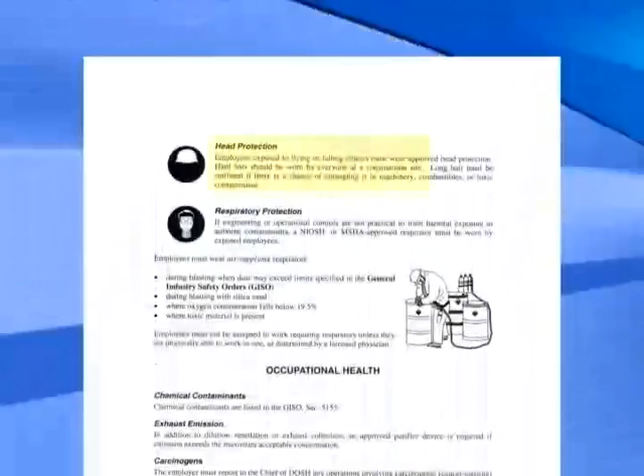Please take out your books and let's start with health and safety orders on page HS1. California administers its own program for workers' health and safety via the California Occupational Safety and Health Administration, Cal-OSHA. I have taken a number of trade exams, including the general engineering and the general building, and I have found a number of questions on those exams relating to health and safety. It's important. Construction is a dangerous business, and it can be made safe, and it's necessary to be made safe.

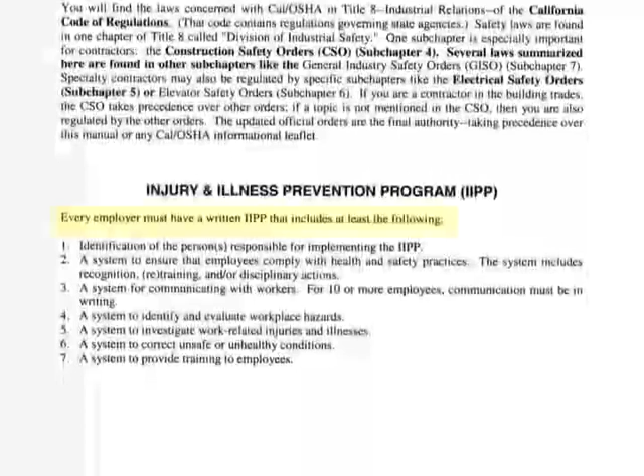So let's get started. On the third paragraph on this first page, in the middle of the paragraph, it talks about construction safety orders. This is what you're going to be tested on, and this relates to construction industry regulations and safety matters. Let's take a look at the bottom of the page, the Injury and Illness Prevention Program. Understand that every employer must have a written IIPP that includes at least the following, and there are 7 items there, 7 programs or systems. Look over that, understand what you're going to be needing to have for your health and safety regulations.

Going on to the next page, HS2. One of the things that is particularly emphasized is tailgate meetings. It is required that you have a tailgate meeting for health and safety every 10 working days. It is also recommended that you have a supervisors and management meeting once a month to discuss safety and implement safety and health regulations. You should also have a code of safe practices, a written code. Now you'll find that available through Cal-OSHA, and they will help you with model codes so you can get what you need from Cal-OSHA.

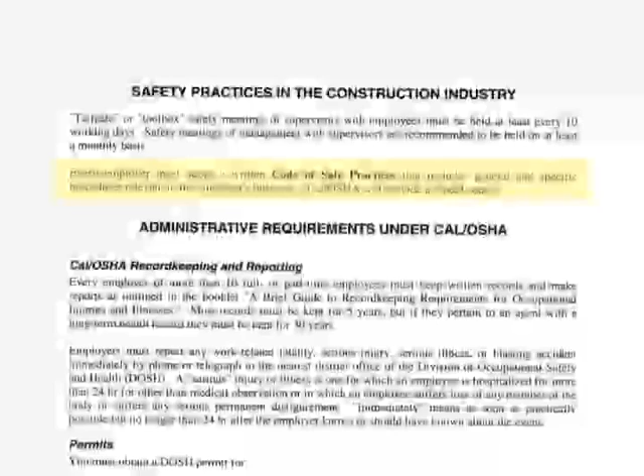Let's look at some of the administrative requirements under Cal-OSHA. In that first paragraph under administrative requirements, note that you do have to keep written records, and they have to be kept for 5 years. And if they deal with matters such as asbestos that are long-lasting, you'll have to keep them for some 30 years. As you go through this health and safety part of your trade exam, make sure that when you see numbers like 5, 30, that you're most likely going to be asked a question about that, and you should pay attention to those pieces of information.

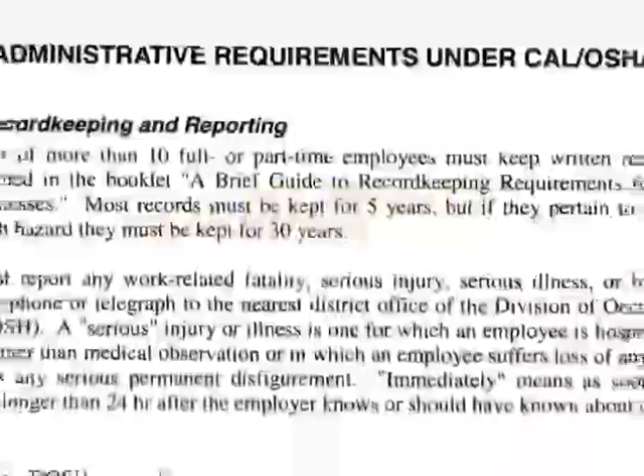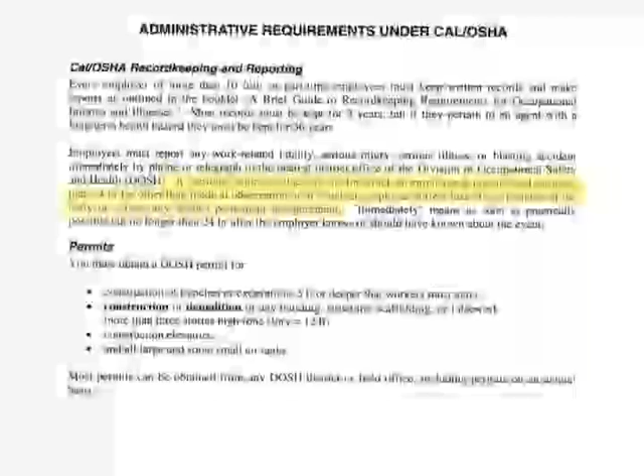In that second paragraph where it begins, employers must report. They must report any fatality, serious injury, serious illness, or a blasting accident, immediately by phone or telegraph to the nearest district office of the Division of Occupational Safety and Health, DOSH. What is immediately? Immediately in this sense indicates that you have to get back to them within 24 hours. And what is a serious injury? A serious injury is when an employee suffers a loss of any member of the body or has to be hospitalized for 24 hours or longer, not just for observation but for treatment. And serious injury also includes disfigurement, permanent disfigurement.

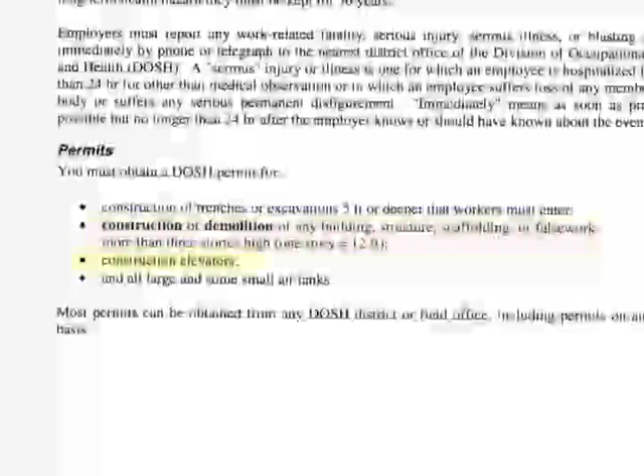Looking at the bottom of this page under permits, let's look at when you do need to get a permit from DOSH. If your construction, excavation, or trench is 5 feet or deeper and the workers must enter, you will need to get a permit. If the construction or the demolition of any building or structure is more than 3 stories high, 1 story is 12 feet. If you're dealing with construction elevators, and if there's any large or sometimes small air tanks, in those situations you will need permits from DOSH.

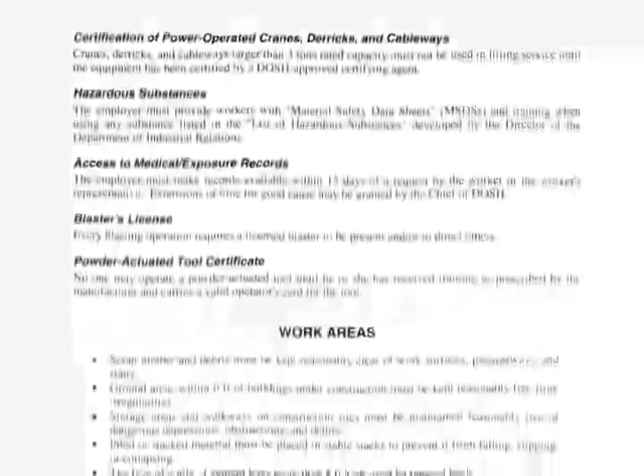Let's turn to page HS3. There's several things here I'd like to talk about. Let's look at hazardous substances. The employer must provide workers with material safety data sheets, MSDS, and training when using any substance listed in the list of hazardous substances developed by the Director of the Department of Industrial Relations. There's another thing I'd like to mention here, the Powder Actuated Tool Certificate. No one may operate a powder-actuated tool until he or she has received training as prescribed by the manufacturer and carries a valid operator's card for the tool. And I also want to call your attention to work areas.

There are several general rules for how to organize things, particularly that the face of a pile of cement bags more than 5 feet high must be tapered back.

I was at a situation many years ago where the bags were stacked up quite higher than that. All of a sudden they started to creep and move. The worker didn't realize it was happening. I alerted him and he jumped out of the way. The bags all came down, but fortunately all of us were safe.

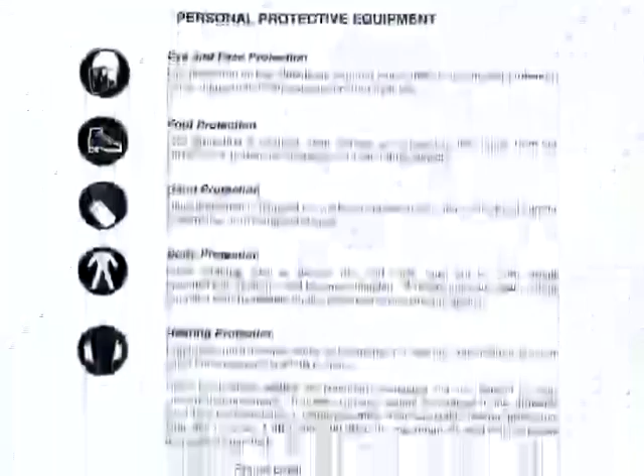Turning on to page HS4, read through this. One of the things Cal OSHA is particularly concerned about is hearing protection. Employers must monitor noise and administer a hearing conservation program when noise exposure is 85 decibels or more.

To give you an idea of what a decibel is, if you're at home speaking, the decibel level is about 60. If you're at a construction site and hear a riveting machine about 30 feet away, you're at about a 100 decibel level. Look over this and understand that as sound levels get higher, the allowed exposure time is reduced significantly. At the bottom of the page it indicates a couple of ways of protecting your ears, through earplugs or sound deadening earmuffs.

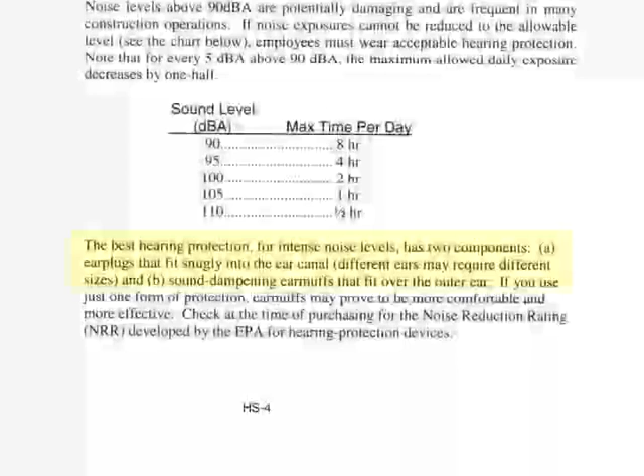Going on to page HS5, at the top, head protection is dealt with, and then respiratory protection. Cal OSHA is particularly concerned about respiratory protection. This is a condition that can cause serious injury very quickly.

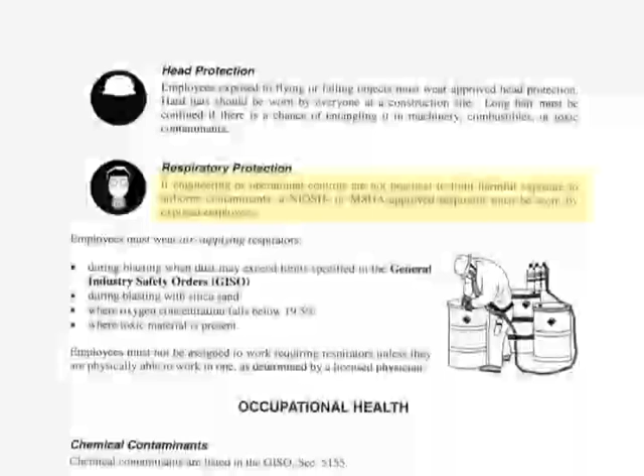If engineering or operational controls are not practical to limit harmful exposure to airborne contaminants, a NIOSH or MSHA approved respirator must be worn by exposed employees. When we talk about engineering or operational controls, in other words, if they can't contain the contaminant away from the employee, then the employee has to put on a respirator of some sort.

There are certain situations where an employee must wear air supplying respirators. There are two different types of respirators. One is an air purifying respirator, which deals with the ambient air and filters out the offending contaminants. The second type is an air supplying respirator, in which air from another source, totally separate from the environment around the worker, is used.

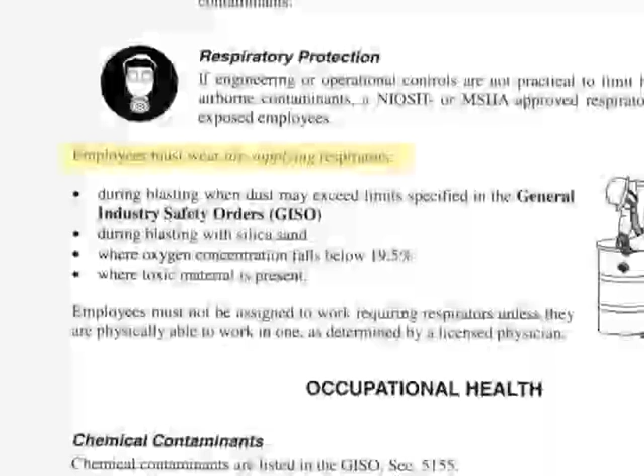Air supplying respirators are used during blasting when dust may exceed limits specified in the general industry safety orders, during blasting with silica sand such as sandblasting, or where oxygen concentration goes below 19.5%, or where toxic material is present.

And this is an important item, a little two-line sentence just above occupational health: employees must not be assigned to work requiring respirators unless they are physically able to work in one, as determined by a licensed physician. Let's go on to occupational health.

Read through the next part there, dealing with chemical contaminants, exhaust, carcinogens, cancer-causing items, and wood preservative chemicals. And then let's get on to page HS6.

We're going to be talking about asbestos. Cal OSHA is quite concerned about asbestos and has several regulations. If you are in a situation where you're going to be dealing with a 0.1% asbestos by dry weight situation...

where it's going to be either sanded, ground, blasted, sawn, cut, shoveled, or removed—in other words, dealt with in virtually any way that might disturb or cut it—it is required that you report that operation to the chief of DOSH before you begin.

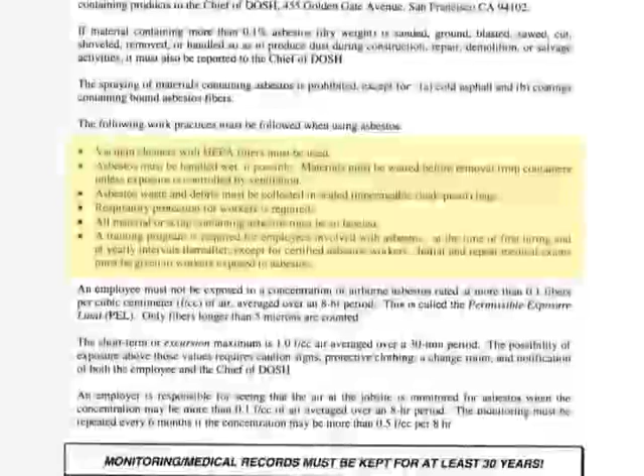On the fourth paragraph, let's look at the following work practices that must be followed when using asbestos. A HEPA filter must be used—this is a certain type of high-level filter. Asbestos must be handled wet if possible. Asbestos waste and debris must be collected in sealed, impermeable, leak-proof bags.

Let's look at exposure. There are two different types of exposures. Just at the middle of the page, it begins: an employee must not be exposed to a concentration of airborne asbestos rated at more than 0.1 fibers per cubic centimeter, averaged over an 8-hour period. This is called the permissible exposure limit, or PEL. Only fibers longer than 5 microns are counted.

There's an additional type of exposure called an excursion exposure, more or less an in-and-out exposure. The short-term or excursion maximum is 1 fiber per cubic centimeter of air, averaged over a 30-minute period. Possibility of exposure above those values requires caution signs, protective clothing, a change room, and notification of both the employee and the chief of DOSH.

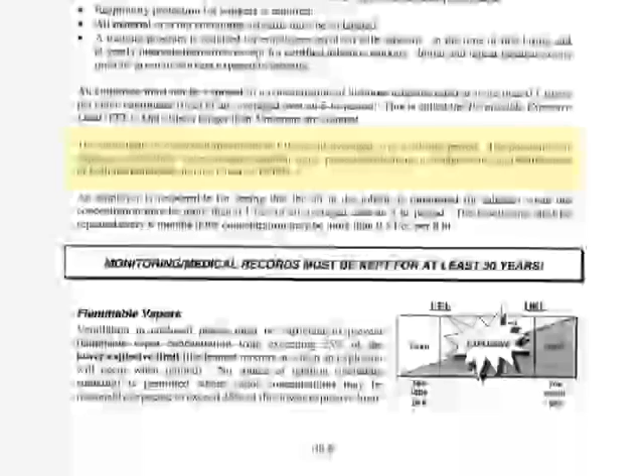Toward the bottom of the page, there's a big capitalized, bold statement. Commit this to memory: monitoring or medical records must be kept for at least 30 years. Asbestos is a long-lasting item that concerns health and safety, and we need to have those records available.

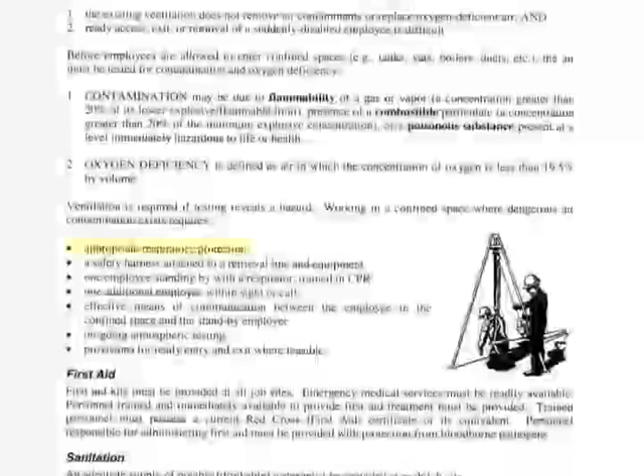First, of course, is respiratory protection. Next is a safety harness attached to a retrieval line and equipment. Here's an important item: an additional employee, or one employee standing by with a respirator trained in CPR, outside of the area, not inside the area. And 3 or 4 more items - go ahead and read through that.

Toward the bottom of the page, under sanitation, 1 toilet must be provided for every 20 employees. Commit that to memory - you'll most likely see that on a trade exam.

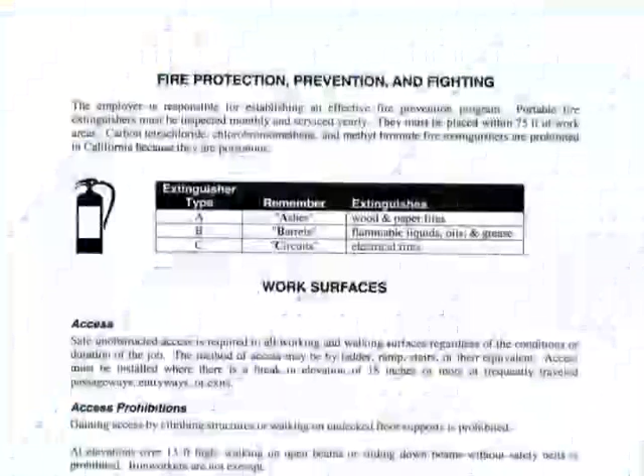On to page HS8, fire protection, prevention, and fighting. One of the important items in this first paragraph at the top of the page: portable fire extinguishers must be inspected monthly and serviced yearly. I'll repeat that - inspected monthly and serviced yearly. And they must be placed within 75 feet of work areas.

You might be asked about these next 3 chemical compositions, whether they are allowed. They are no longer allowed because they are poisonous: carbon tetrachloride, chlorobromomethane, or methyl bromide.

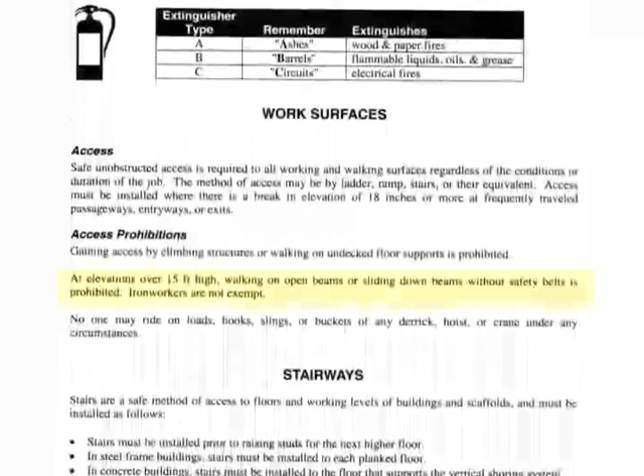Down to the middle of the page, under access prohibitions: at elevations over 15 feet high, walking on open beams or sliding down beams without safety belts is prohibited. Iron workers are not exempt. Read through the stairway section toward the bottom of the page, and let's go on to page HS9.

Ladders. We have a healthy respect for ladders, and Cal OSHA has a lot to say about ladders. Ladders are used in almost every trade. I have a healthy respect for ladders - I remember some years ago, I fell off a 3-foot high part of a ladder and ended up with a 4-month set of crutches.

So let's take a look at ladders. The very first part: ladder rungs must be at least 11.5 inches long and spaced 12 inches apart. Step ladders may not be taller than 20 feet - a step ladder that tall would be pretty heavy. You usually see them maybe up to 14 or 16, but the limit is 20 feet. Cleat or straight ladders may not be longer than 30 foot, and extension ladders may not be taller than 44 foot.

Overlapping sections must be at least 10% of its working length. So if you have a 20-foot ladder, you have to overlap it by 2 feet. Look over the rest of this page on job-built ladders and landing platforms, and understand the safety thrust that's going on here.

Turning the page to HS10, ladder safety: secure ladders in use against movement. I had a situation where a worker didn't do that - just recently he's nursing a ruptured Achilles tendon, and maybe another part of his foot. He's getting fine, but as we said, after the accident, ladder safety.

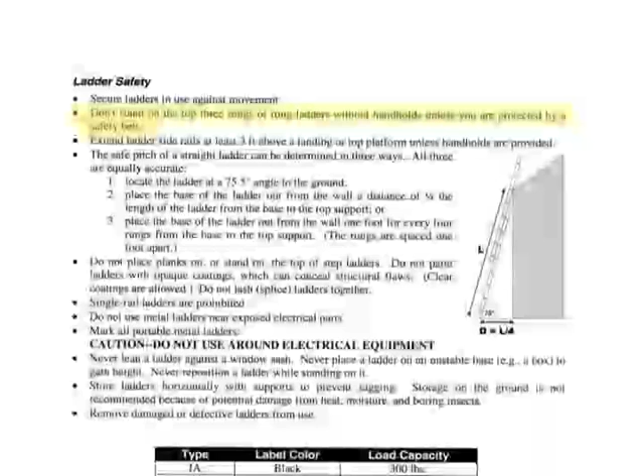Don't stand on the top 3 rungs of rung ladders without handholds unless you are protected by a safety belt. Okay, that's an important item. And extend ladder side rails at least 3 feet above a landing or top platform unless handholds are provided.

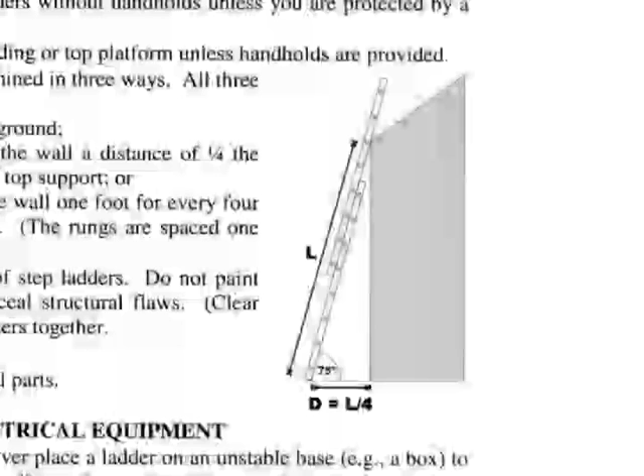The next part, determining the safe pitch of a ladder, is very important. You most likely will see this on one trade exam or another. Let's take a look at a couple of the ways to do it. First way to set a ladder correctly is to put it at 75.5 degrees angled to the ground. This is very important - look at the little diagram to the right there, you can get an idea of what 75 degrees looks like.

In day-to-day construction on the job site, one of the easiest ways to do it is to put it 1 foot out for every 4 foot up. That works out simply to be a 1-to-4 ratio. So 4 feet up, 1 foot out. If you're 12 feet up, then you're going to be 3 foot out.

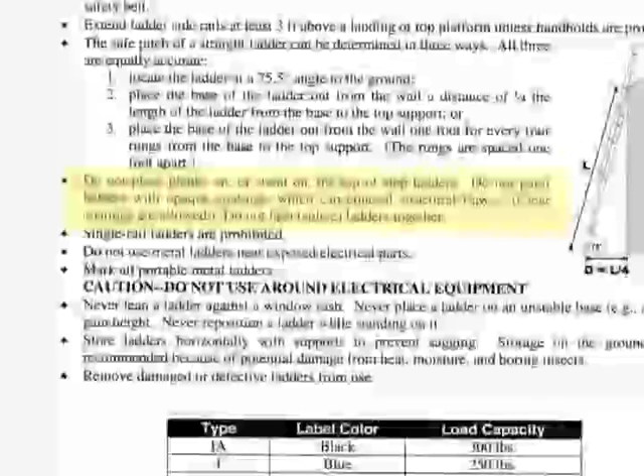Do not place planks on or stand on the top of step ladders. And do not paint wood ladders, particularly, with opaque coatings. Why? With the paint, you're going to cover over cracks in the ladder that indicate it should be destroyed and discarded. Also, do not use metal ladders near exposed electrical parts.

The next item is marking metal ladders. Mark all portable metal ladders: caution, do not use around electrical equipment. Why do we put that caution sign on metal ladders? Metal ladders are conductors. If the top of that metal ladder connects with a high voltage line, you seriously risk electrocution. It has happened too many times, so take that caution.

Go ahead and read down through the rest of the page, noting the different types of ladders. I myself like to purchase the 1 or 1A ladder, even though it might weigh a few more pounds.

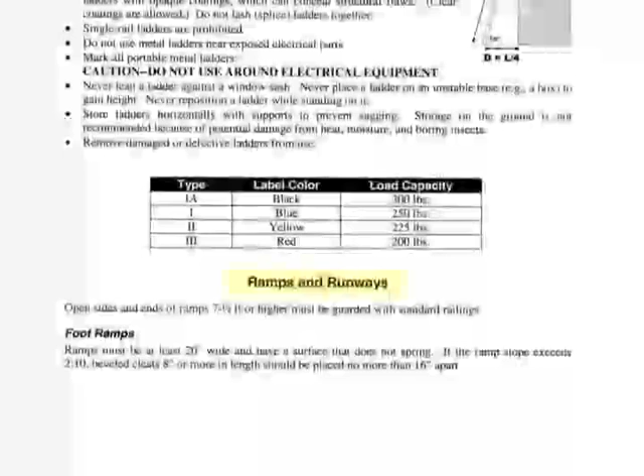Continue reading down through ramps and runways, and let's go on to page HS11. Toward the top of the page, powered buggy ramps and runways. Ramps and runways must be at least 5 feet wide and designed with turnouts for two-way traffic. It's important that you know that, it's a question that may well be asked of you. It's a simple item to remember: 5 feet wide for a ramp or runway.

Read through construction elevators, and let's go on to page HS12. We're going to be talking about excavations, trenches, and earthwork. This is a very important part of safety and health. DOSH has unfortunately found out that there are a lot of fatalities, particularly in trenches, and it's sudden.

Let's look at, before you dig, go ahead and read through that, and let's look at a situation where you have 4 feet or more depth from digging a trench. I'm going to read it to you: provide a safe way for workers to enter and leave the excavation, for example ladders, within 25 feet of any work area, a minimum of every 50 feet at a large site.

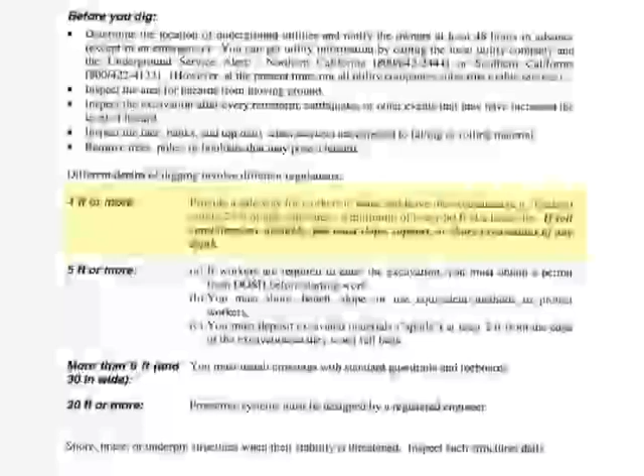And if soil conditions are unstable, you must slope, support, or shore excavations of any depth. If you're at a situation where you're 5 feet or more, pay particular attention to the first item there of 3. Number 1, if workers are required to enter the excavation, you must obtain a permit from DOSH before starting the work. Pay attention to that. Read those other 2, and then let's go on to the next page, HS13.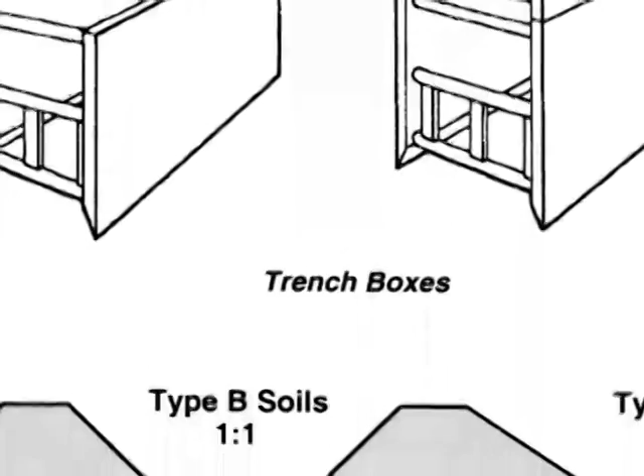We deal with shafts and shoring on this page, and underneath the diagram where it shows the trench boxes, which are huge steel constructions, it shows the different types of soils. Let's look at the second diagram where it shows different types of soils. Note that in type B soils, which is an average type of soil, you are required to do a 1-to-1 slope. In other words, it must slope back 1 foot for every 1 foot of height.

Let's go on to page HS14. Guardrails: open sides of all work surfaces 7.5 feet high or higher must be guarded by railings or periphery cables, or else workers must be protected by safety belts or nets. Floor and roof openings in any work surface must be covered or guardrailed. Covers must bear a warning sign.

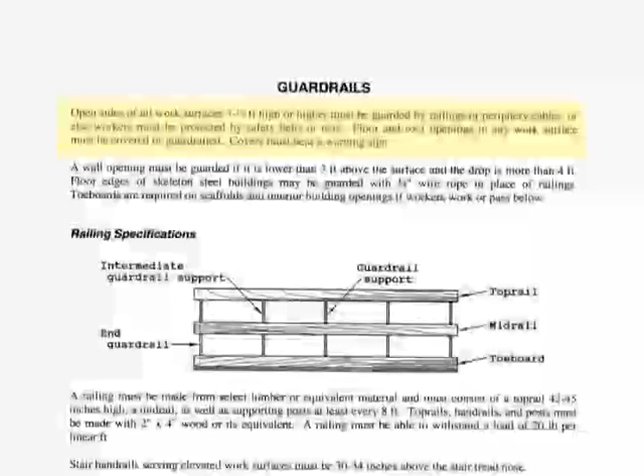Let's take a quick look at the sketch here, or the diagram of the railing. Note that it has 3 rails: a top rail, a mid rail, and a toe board. The purpose of the toe board is to keep things from falling down onto workers below, particularly heavy tools or materials such as bricks. Please go ahead and read the information on floor planking, and then let's go on to page HS15.

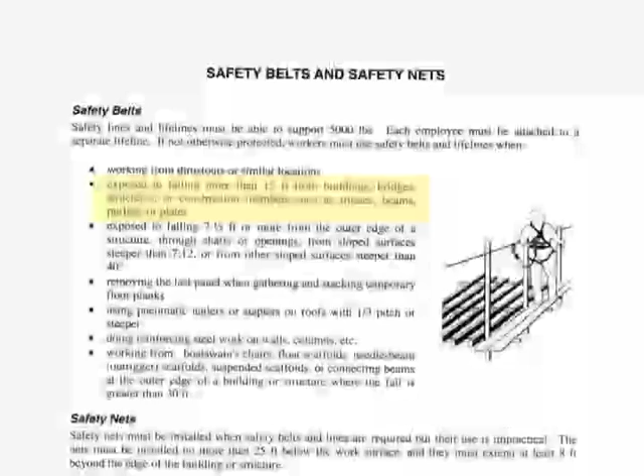Safety belts at the top of the page. Look at that second bullet: if you are exposed to falling more than 15 feet from buildings, bridges, structures, or construction members such as trusses, beams, purlins, or plates, you are required to be in a safety belt. Look at the rest of those bullets, go ahead and read through those.

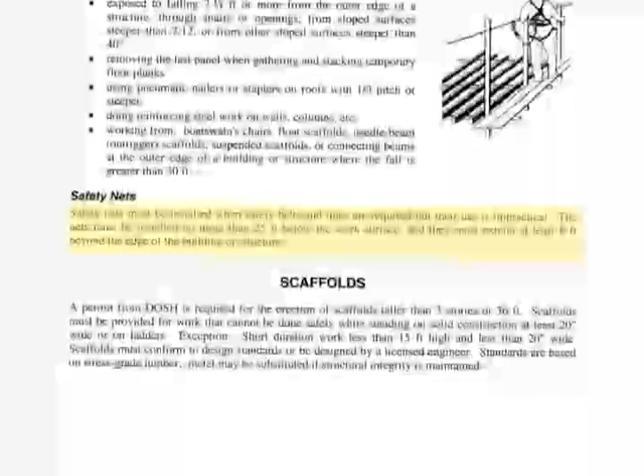Let's come down to safety nets. When are safety nets needed? Safety nets must be installed when safety belts and lines are required, but their use is impractical. In other words, the safety belt would be in the way of getting the job done. The nets must be installed no more than 25 feet below the work surface, limiting the fall to a maximum of 25 feet, and they must extend at least 8 feet beyond the edge of the building or structure.

Let's look at scaffolds. Scaffolds are very convenient for construction work and very dangerous, so DOSH puts a lot of information and attention on scaffolds. As a matter of fact, one of the founders of this company that provides these lectures, on his first day of construction, saw his friend fall from the scaffold and had to go tell the wife that he had died.

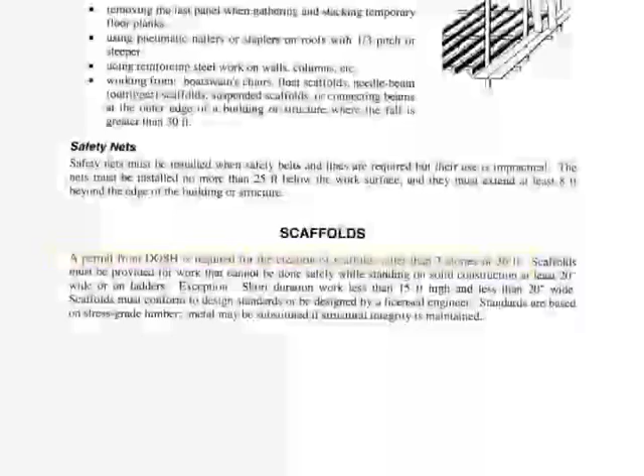So it's important that scaffolds be put up correctly and safely. If you're dealing with a scaffold that's going to be 3 stories or 36 feet or higher, you need to get a permit from DOSH before you get started with that. Read through the rest of scaffolds, and let's go on to page HS16. Required safety and access and securing scaffolds. Go ahead and read that.

Let's look briefly at scaffold platforms, light trades and heavy trades. Platform minimum width - how wide does that platform have to be? If it's a light trade, 20 inches by 10 feet in length, so it has to be at least 20 inches wide. If it's a heavy trade, it's going to have to be at least 4 feet wide by only 7 feet long - 7 is the maximum you could go. You would need a stiffer board for heavier trades, of course.

Let's go down to scaffold planking. This is using scaffold grade lumber, that's a high grade of lumber. Make sure that you've got scaffold grade lumber. The minimum size is 2 inches thick and at least 10 inches wide.

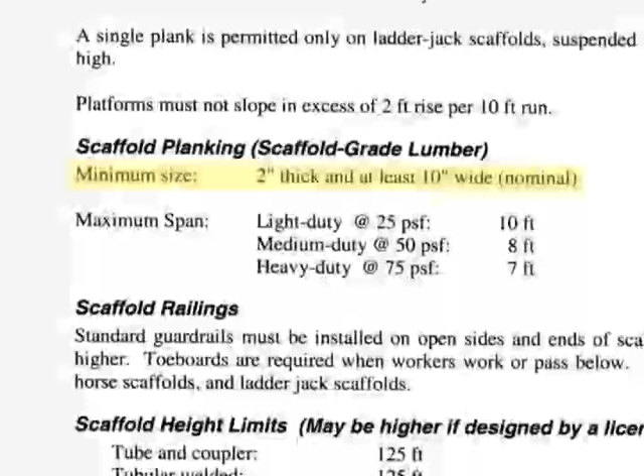Maximum span when using this scaffold planking - if you're a light duty trade like carpentry, for example, and you're at 25 pounds per square foot, you can get as much as 10 foot in length on your plank. But if you get into the medium duty or the heavy duty, look how that drops. It drops to 8 feet and then finally to 7 feet maximum for a heavy duty trade such as masonry.

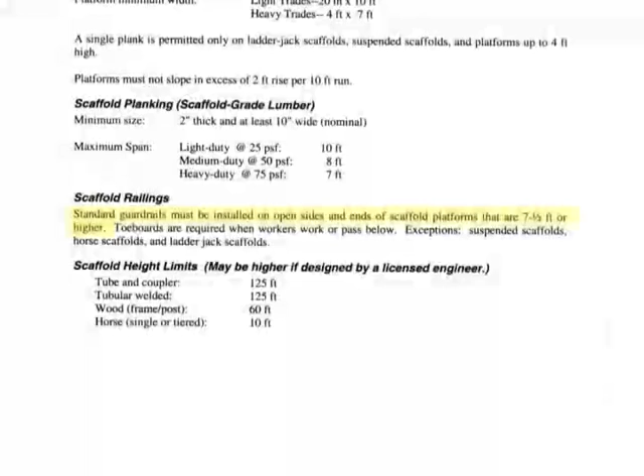On a scaffold railing, let's just go ahead and read here. Standard guardrails must be installed on open sides and ends of scaffold platforms that are 7.5 feet or higher. I don't know about you, but when I've been on a scaffold, if there's a railing around me, I feel I can do more work more efficiently and not have to worry about falling off that scaffold. So go ahead and put those guardrails up.

On scaffold height limits, let's look at the bottom of the page here. We've got 4. First 2 are heavy-duty steel of different types - you can go up to as much as 125 feet in height, that'd be essentially 10 stories. It's quite a bit. On a wood frame or post scaffold, you can go up 60 feet. On a horse, which is basically 2 sawhorses with planks on top, you can go up as high as 10 feet. Flip the page to HS17 and let's look a little bit more at some scaffolds that are prohibited.

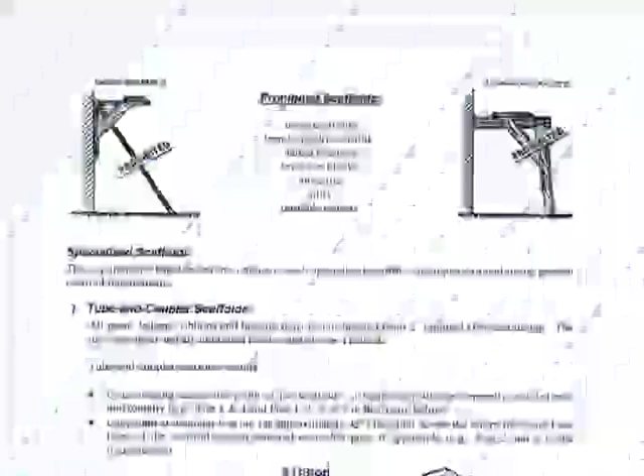Top of the page on HS17, the 2 at the top there, the diagrammed ones - that's the shore scaffold to the left, shored up by that diagonal pole, and the lean-to jack or jack scaffold on the right there. Why are they prohibited? Simply because they're site-built without an engineer on site. Cal OSHA has seen too many problems, too many bad accidents from these, so they simply out and out prohibit them. The next subject is specialized scaffolds.

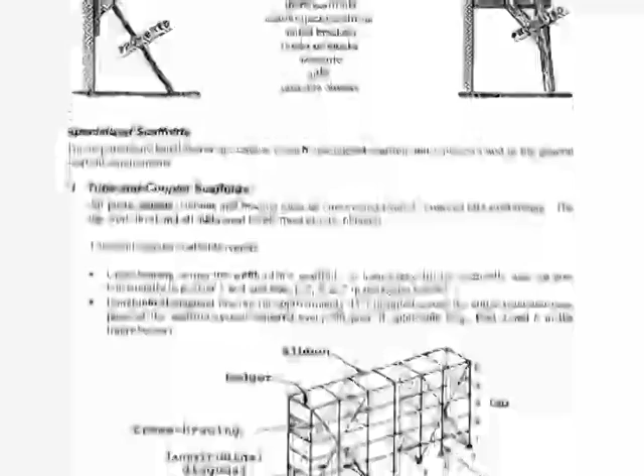Each trade has its own different type of scaffold, and as you study your trade exam, make sure that you understand the specific scaffolds used in your trade. You will most likely be asked questions about those types of scaffolds. Looking at the tube and coupler scaffolds, what I need you to do is simply look at the diagram and understand the different terms there - for example, ledger, ribbon, cross bracing, so on and so forth. Bring those to memory. Let's go on to page HS18.

Very top there, tower and rolling scaffolds. On that fifth bullet that begins, two wheels or casters must swivel, all four must lock. Until you have that situation on your scaffold, you're not legal with Cal OSHA.

And are you going to ride that moving scaffold? Well, it's prohibited unless all of the following conditions are met: the surface is smooth and within 3 degrees of level, and the smaller dimension of the scaffold base is at least half the scaffold height.

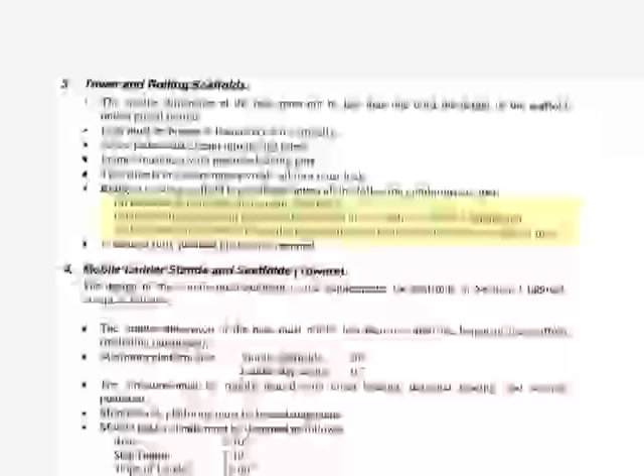And C, the wheels have rubber or similar resilient tires or metal wheels for towers 50 feet or more. Go ahead and look at mobile ladder stands and scaffolds, and let's get on to HS19.

Let's look at suspended bricklayers or masons scaffolds. This makes particular sense to me. When I took my masonry exam, my C29 exam, I had several questions regarding scaffolds because it was specific to a bricklayer. In your own trade, if you have those special scaffolds, pay particular attention to the requirements and rules and regulations from Cal OSHA. Most likely you'll be asked some very specific questions about those scaffolds.

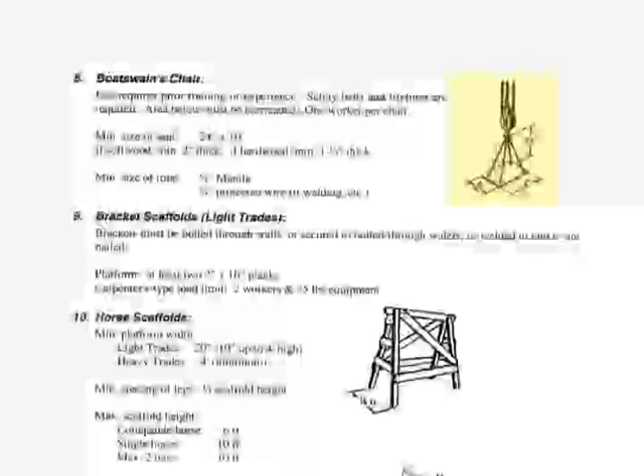Let's flip over to page HS20. Let's look at a couple of additional scaffolds over here. The boatswain's chair or the bosun's chair. Note that there's only one worker per chair in that situation. There's only really room, but sometimes people can be a little crazy and try to load it up with more than one. Let's drop down to horse scaffolds.

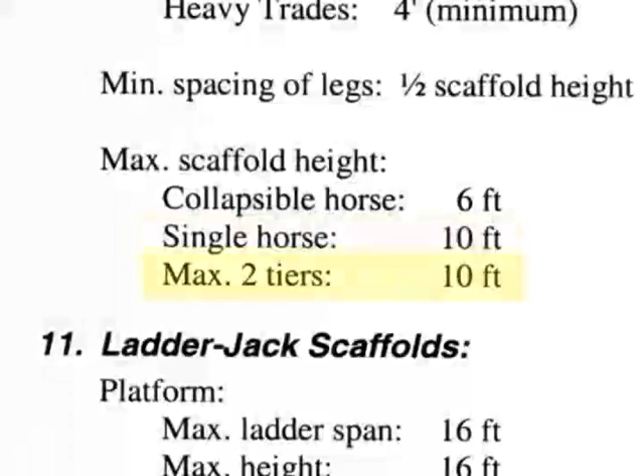These are frequently asked about in several trade exams. Let's look at the maximum scaffold height. For a collapsible horse, it's only 6 feet, so not very tall. For a single horse, the limit is 10 foot in height, and a maximum of 2 tiers. If you've got a lower tier and an upper tier, again, the maximum is still the same, only 10 feet.

On a ladder jack scaffold, it's where you have 2 ladders with a platform across them, and again, look at the diagram there. The maximum height is 16 feet. I've been on a couple of those. You know, I don't particularly care for those. They seem a little out in the middle of space, but it is legal as long as you keep them at 16 feet high or lower.

On the window jack scaffold at the bottom of the page there, again, there's another 1 worker per scaffold situation. Let's flip over to page HS21. We've finished up with scaffolds and now we're on to electrical.

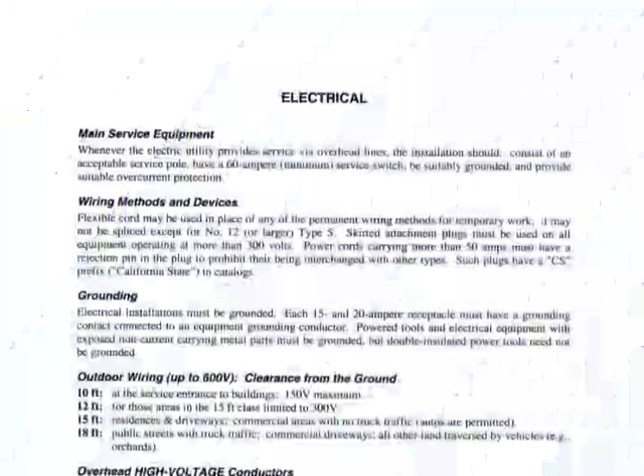Let's look at wiring methods and devices, the second paragraph there. Flexible cord may be used in place of any of the permanent wiring methods for temporary work. It may not be spliced except for number 12 or larger type S. Skirted attachment plugs must be used on all equipment operating at more than 300 volts.

So more than 300 volts, make sure you have a skirted attachment plug in place. Look at grounding. Electrical installations must be grounded. Go ahead and read through that. Let's look at outdoor wiring. Clearance from the ground. We have a couple of clearances, as in the next 2 or 3 paragraphs, but we're looking at clearance from the ground. Note that we have a 10-foot clearance, a 12-foot, a 15-foot, and an 18-foot. The thrust or the basic point is here: the more traffic you have, the more height you need for decent safety. So read through that section there, clearance from the ground.

Next section, overhead high voltage conductors. Go ahead and read that. Understand that you want to be at a safe distance as you work underneath high voltage lines.

Outdoor wiring, clearance from buildings. Before it was clearance from the ground. In this situation, it's clearance from buildings, neighboring buildings. Go ahead and read that. For example, open wiring and cables must clear a roof by 8 feet. Let's go on to page

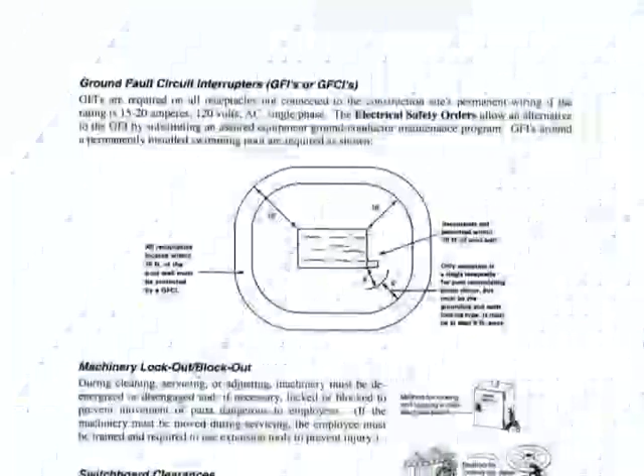HS22. Ground fault circuit interrupters, GFIs or GFCIs. In this diagram here, it is a swimming pool situation, and this diagram is based on the electrical safety orders of Cal OSHA. If you are using an NEC, that is a National Electric Code situation, you may find different numbers. If so, make sure that you know which context you are in. Are you in the NEC, or National Electric Code, context, or are you in a context in which Cal OSHA applies? Machinery lockout and blockout.

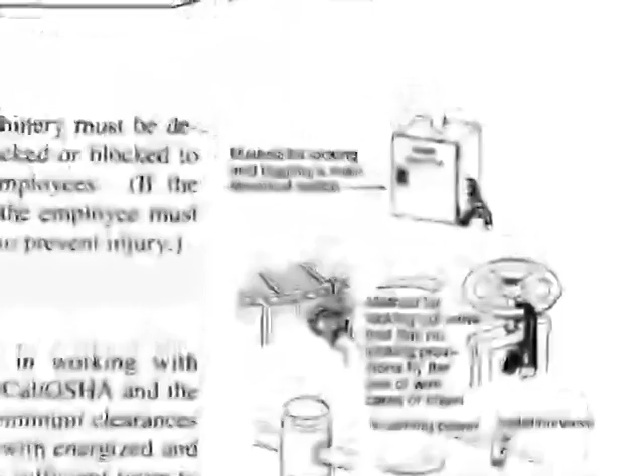This again is another very important item. A lockout situation, of course, is when you are going into an environment where the machine, if it is not turned off, can be very dangerous. So you turn it off and you put a lock on it. If it's a very dangerous situation, you may see 2 or 3 locks and several keys distributed to several individuals to make sure that nobody turns that machine back on again.

A blockout is a mechanical block, such that the machine, for example a stamping machine, cannot come down because there are huge blocks in the way.

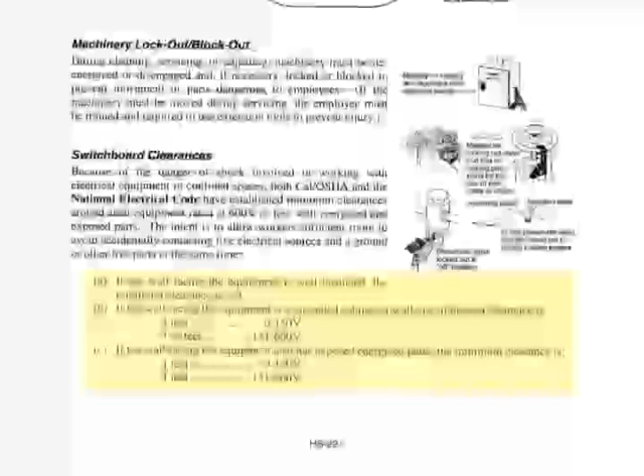Switchboard clearances. Look at the bottom of the page here, talking about how much working clearance you should have in electrical equipment. Read through that, and then let's turn to page HS23.

We're looking at tools. Go ahead and read through that, control switches, and so forth. Let's look at power tools for a minute. The more you use a cord, the more you abuse it, it gets stretched, the covering gets broken away. Pretty soon you've got a couple of bare wires ready to contact each other, or worse, somebody grabs it and doesn't realize it.

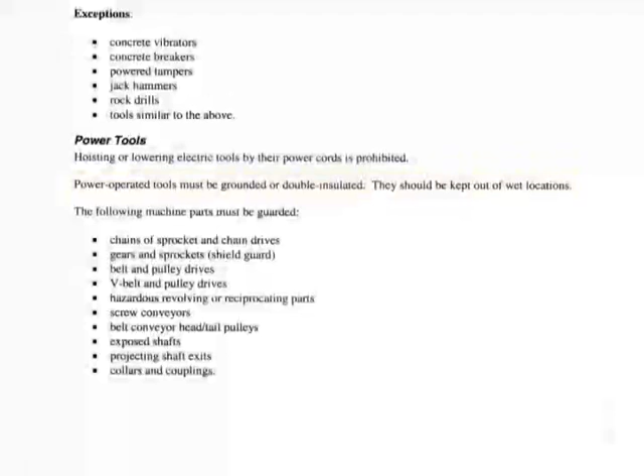Power-operated tools must be grounded or double insulated. They should be kept out of wet locations. Go ahead and read through the rest of that at the bottom of the page there, and let's turn to page HS24.

Let's look at PAT, powder-actuated tools. That is powder, not power. What do we mean by powder-actuated? This is typically a gun that will fire a hardened nail into concrete, for example, and it's powered by basically a .22 shell without the bullet. It's put into the gun, and in place of the bullet is the nail. It's a very convenient device, but in the hands of somebody who doesn't know what they're doing, it can be dangerous. So there are a number of rules and regulations.

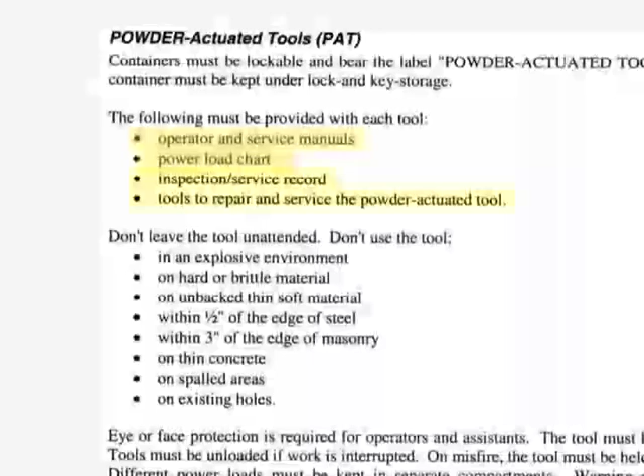Let's look at a few of them here. What must you provide with each tool? A manual - the first of four bullets at the top. A power load chart, the second bullet there. Inspection and service record, and tools to repair and service the powder-actuated tool.

And there's a number of bullets here. What do we have here? Eight bullets talking about where you should not use that powder-actuated tool - for example, in an explosive environment, and so forth. Go ahead and read through the rest of those.

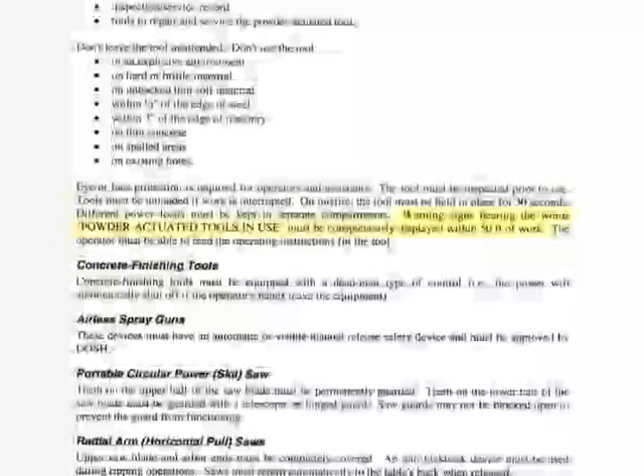In the middle of the page, where it begins, eye or face protection is required for operators and assistants. Read through that paragraph, pay particular attention to the second-to-last sentence where it begins, warning signs. Warning signs bearing the words 'powder actuated tools in use' must be conspicuously displayed within 50 feet of work. Most of the time on a job site when somebody is using one of these, you'll hear 'fire in the hole' before it goes off, so people are not surprised by the sudden explosive sound. Again, take care to read through that.

Look through the rest of these tools on this page: concrete finishing, airless spray guns, portable circular power or Skil saws, radial arm saws. Read through those, and understand the safety concept behind each one.

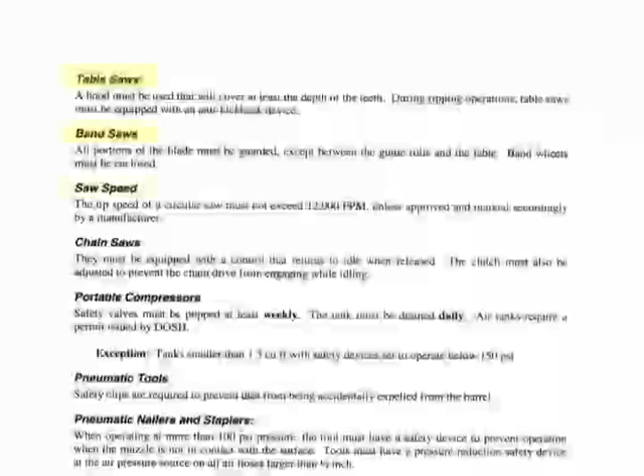Going on to page HS25: table saws, band saws, saw speed, chainsaws. Go ahead and read through that, again understanding the concept of safety being presented.

Let's look at portable compressors for a minute. Safety valves must be popped at least weekly. Tank must be drained daily. Make sure you understand the difference between popping the tank and draining the tank. Air tanks require a permit issued by DOSH.

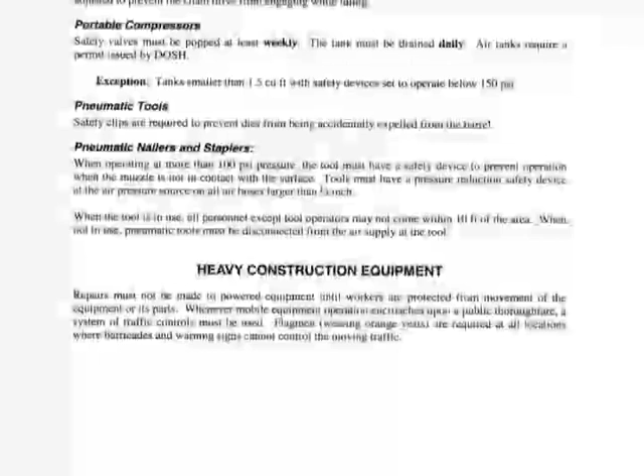Go ahead and read through pneumatic tools, nailers, and staplers. At the bottom of the page, let's start in on heavy construction equipment. One of the things I want to make sure you understand is that last sentence: flagmen wearing orange vests are required at all locations where barricades and warning signs cannot control the moving traffic.

Turning over to page HS26, let's look at rollover protection and seatbelts. Why rollover protection? In earth-moving equipment, you're always on a grade of some kind, and you can be just a little bit more tipped over than you think. Rollover protection and seatbelts are required for equipment with a brake horsepower rating above 20. Go ahead and look at those eight, ten or so bullets of different types of machines.

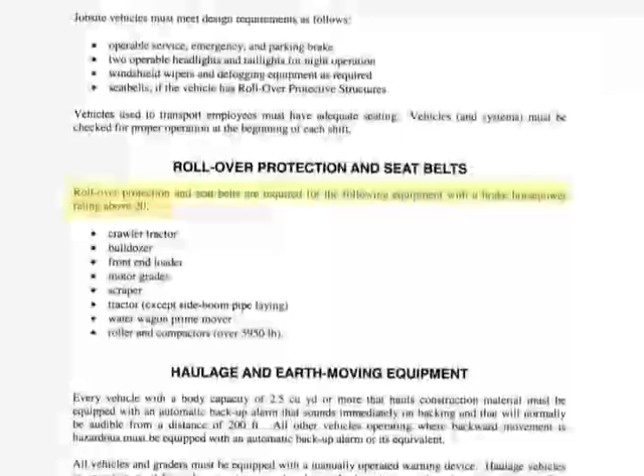One of the most important things, and one you often see on the trade exam, is a question about the backup alarm. Let me simply read this paragraph to you: every vehicle with a body capacity of 2.5 cubic yards or more that hauls construction material must be equipped with an automatic backup alarm that sounds immediately on backing, and that will normally be audible from a distance of 200 feet.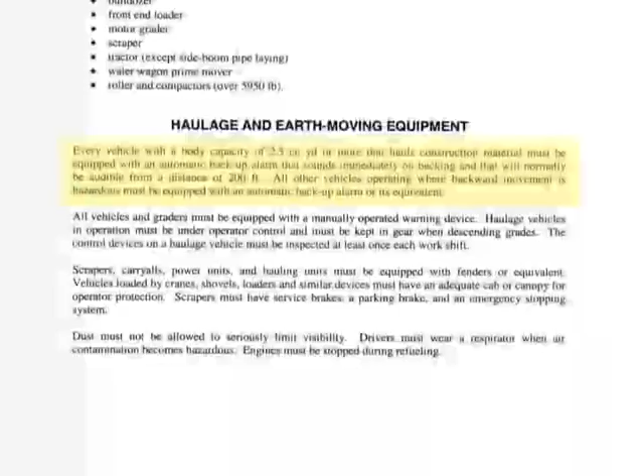All other vehicles operating where backward movement is hazardous must be equipped with an automatic backup alarm or its equivalent. You should be able to hear that backup alarm from 200 feet. If that truck or machine carries more than 2.5 cubic yards, make sure you have an automatic backup alarm on it. Read through the rest of that page, and let's flip over to page HS27.

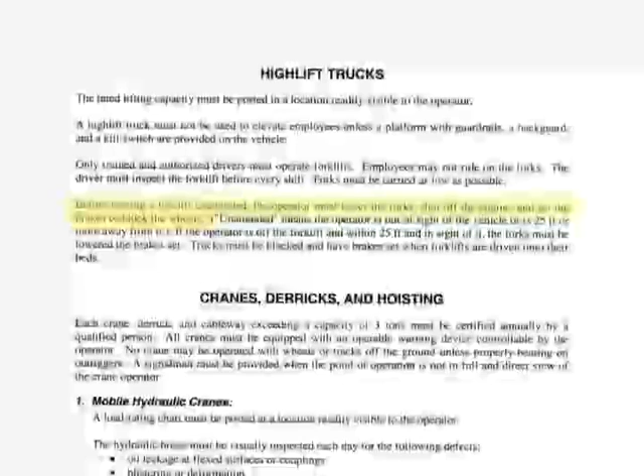We have more information regarding high-lift trucks, cranes, derricks, and hoisting. High-lift trucks, go ahead and read down through those first 3 paragraphs, and let me emphasize this 4th paragraph. Before leaving a forklift unattended, the operator must lower the forks, shut off the engine, and set the brakes or block the wheels. Important piece of information. You may well be asked that question on your exam. Go ahead and read the rest of that paragraph.

Let's look a little bit at cranes, derricks, and hoisting. Each crane, derrick, and cableway exceeding a capacity of 3 tons must be certified annually by a qualified person. So, more than 3 tons, you need an annual certification. Go ahead and read through the rest of that, making note regarding mobile hydraulic cranes, especially if that's going to be involved in your trade.

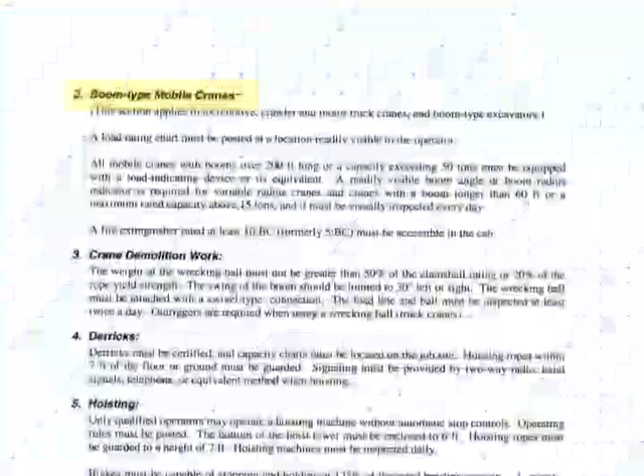Now let's get on to page HS28. Let's go ahead and look this over, particularly the boom type mobile cranes. At the end of that section, the 4th paragraph, a single line paragraph, a fire extinguisher rated at least 10 BC, formerly 5 BC, must be accessible in the cab. What does that mean, 10 BC? Simply this: 10 refers to the pounds of reacting extinguishing agent in the canister or extinguisher, and BC refers to the type of fires that can be put out with that agent. B referring to an oil fire, C referring to an electrical fire.

And then crane demolition work, derricks, and hoisting. Go ahead and read through that again. If these relate to your trade, pay particular attention to them.

Moving on to page HS29, hot work: cutting, heating, or welding. A dry chemical or carbon dioxide fire extinguisher rated at 6 BC or more must be kept near cutting, heating, or welding. If bottled fuel gases are in use, it must be at least 10 BC. So again, there's those extinguisher numbers: 6 pounds on the first requirement, 10 pounds on the second requirement. And go ahead and read through the rest of that, what welders are required to wear, and so on and so forth.

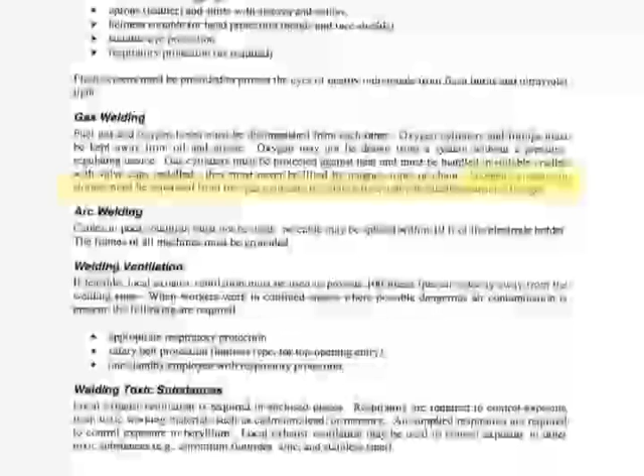Let's look briefly at gas welding. Read through that paragraph, and at the bottom, the last sentence, make sure you understand it: Oxygen cylinders in storage must be separated from fuel gas cylinders by 20 feet or by a non-combustible barrier 5 feet high. So if you have an acetylene tank and an oxygen tank, you need to separate those by 20 feet or by a non-combustible barrier 5 feet high. Go ahead and read through arc welding and welding ventilation, and let's get on to page HS30.

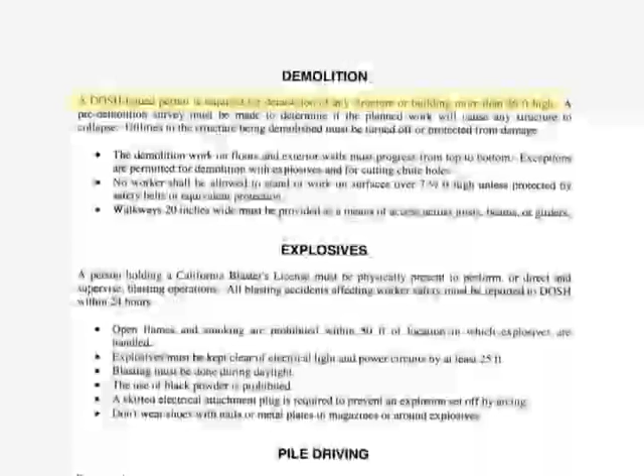Let's take a little look at demolition here. Here's a common question that you'll find on your trade exam. A DOSH issued permit is required for demolition of any structure or building more than 36 feet high. So if you're going to take down a building that's 40 feet high, do you need a permit? Yes, you do. It's over 36 feet. You need to go to DOSH to get that permit. Go ahead and read through the rest of that, and let's look at explosives.

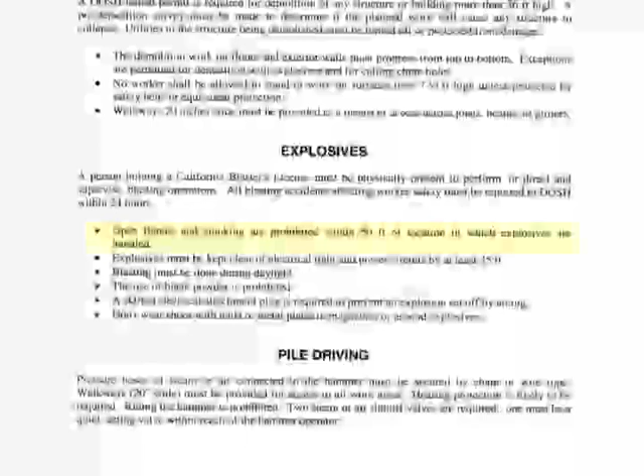A person holding a California blaster's license must be physically present to perform or direct and supervise blasting operations. All blasting accidents affecting worker safety must be reported to DOSH within 24 hours. And there's several bullets here explaining what conditions are needed to be safe when using explosives. First, open flames and smoking are prohibited within 50 feet of the location in which explosives are handled. Also, the use of black powder is prohibited.

There's a little bit of a story why that came about. In the 1906 San Francisco earthquake, the Army was involved in creating fire breaks as the fire roared through San Francisco, and they simply had to blow up buildings to create those fire breaks.

When they did that, after a while they had run out of TNT, and so they switched over to black powder. Black powder is not as controllable as TNT. The result was that a lot of the debris went up in the air not only in little pieces, but in little flaming pieces, and came down in little flaming pieces, simply spreading the fire rather than making a fire break.

Go ahead and finish reading through the rest of that, and then look through pile driving. Let's note one item here on that second line: hearing protection is likely to be required. If there's any doubt in that situation, tell your employees to go ahead and use the hearing protection. And that finishes up HS30.

Let's go on to HS31, false work and vertical shoring. What is false work? False work is temporary structural supports that are used during construction and then removed. In a masonry situation, you build first a wooden arch, put it in place, and then over that wooden arch you set your bricks until they are secure and cured, and then you take it away a couple of days later. That would be false work.

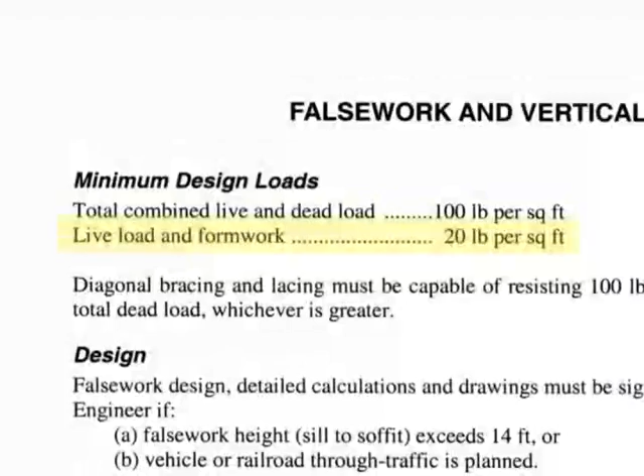Minimum design load, total combined live and dead load, again I'm here at the top of the page, is 100 pounds per square foot. Live load and form work, 20 pounds per square foot. Take a look at that, read through the rest of this. Let's get down to roofing operations. As you go along in these next pages, we have quite a bit on roofing operations. If you're a roofer, if you're taking the C39 trade exam, you're going to need to put a lot of time in on this and make sure you know the details and the numbers.

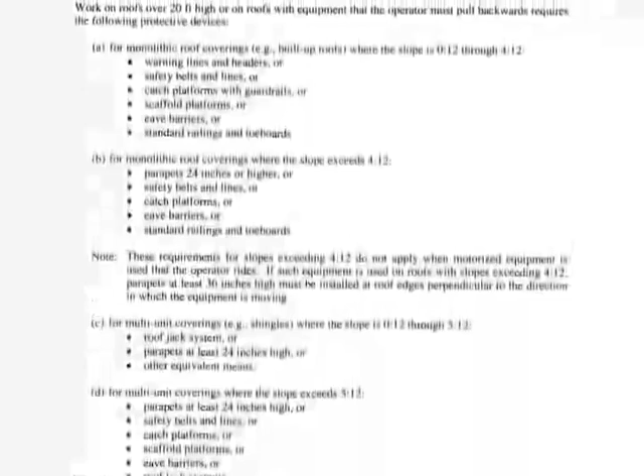Go ahead, look through this, and let's flip over to page HS32. Again, this page really deals with roofing, so if you're in a trade that doesn't deal with roofing, you can look over this quite quickly. But you C39s, take a careful look at this. Understand that we're looking at a couple of different slopes here. For example, in A, for monolithic roof coverings, built-up roofs, where the slope is 0 in 12 through a 4 in 12, then these six or so items apply.

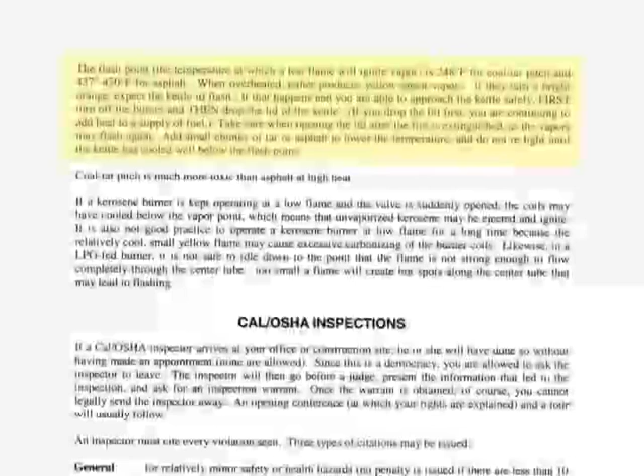Let's look over to page HS33. Again, we're still dealing with roofers in the top half of the page, and the flash point is dealt with. In other words, a flash point is where a vapor collected because of the material you're using, asphalt for example, is ready to turn into flame. It's a very dangerous situation. You want to know about that.

The last section we're going to talk about is Cal/OSHA inspections. If an inspector is on your site, you may end up with a citation, hopefully not, but you may end up with a general citation, which is for relatively minor safety or health hazards. No penalty is issued if there are less than 10 items cited. A serious citation is for hazards that may cause a major illness or injury. And a regulatory citation is for failing to comply with record-keeping or reporting requirements.

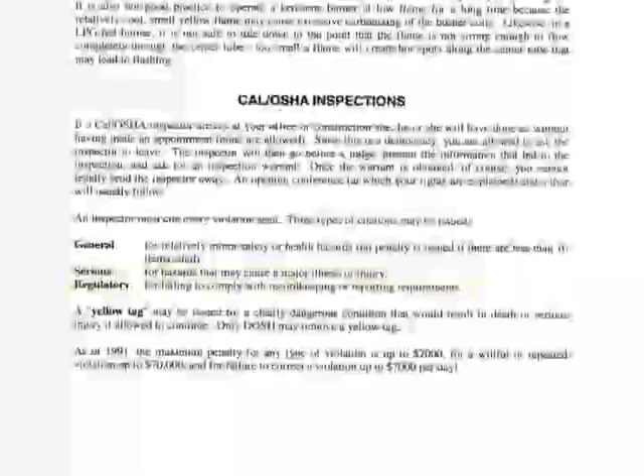And if you come to your site and find a yellow tag there, it may have been issued for a clearly dangerous condition that would result in death or serious injury if allowed to continue. Only DOSH may remove that tag. You don't want to touch that tag, but you want to deal with it right away. This covers safety orders. I'd like you to know that we also have a glossary as well as an index following immediately, and behind that, some additional information that you should read. Please go ahead and take a look at that.

Now remember, once again, these questions from health and safety can be as much as 15 to 20% of your test, so it's a significant amount of your test. And not only is that a test matter, but it's also a smart business matter. Put that into your business, protect your employees, protect yourself.

May you do well in the construction industry and well on the exam. Thank you very much, I appreciate your time and interest. This completes the lecture on health and safety. Please note that a glossary of terms, an index, and additional information can be found at the end of the chapter.